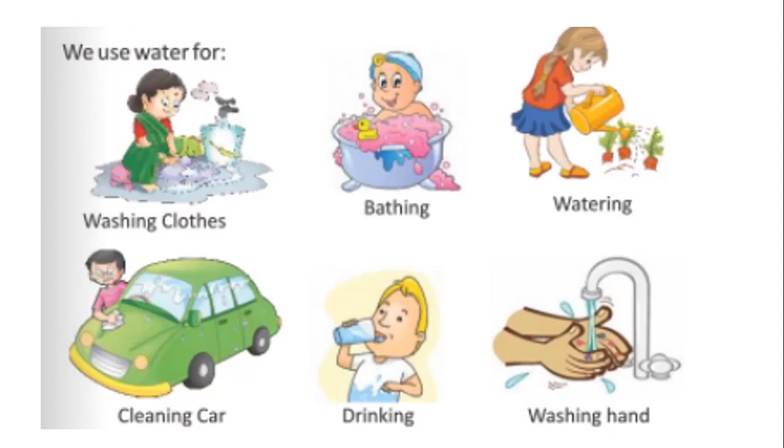We use water every day for drinking, bathing, washing clothes, cooking food, washing utensils, flushing toilets, mopping the floors, etc. We cannot think of our life without water. We use lots of water daily, which is passed on to the drainage system every day. We all use water, and in that process of using water, we make it dirty.

The water, rich in lather, mixed with oil and other pollutants that go down the drains from sinks, showers, toilets, laundries, is dirty. And this is called wastewater. Water, our lifeline. Water is needed by all life forms. Clean water is a basic need of human beings.

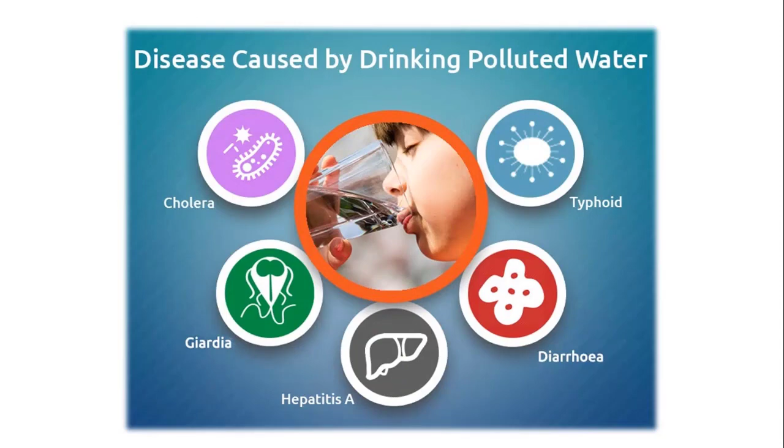Unfortunately, clean water is not available to a large segment of human populations. The water which is unfit for human consumption becomes the source of many waterborne diseases, which ultimately leads to loss of human life. It is estimated that 1 billion people do not get safe drinking water. So, realizing the urgency, we celebrate 22nd March as World Water Day to bring awareness amongst people for safe water, which is fit for human consumption.

Thus, the water is cleaned by removing pollutants before it enters a water body or is reused. This process of wastewater treatment is commonly known as sewage treatment, which takes place in several steps.

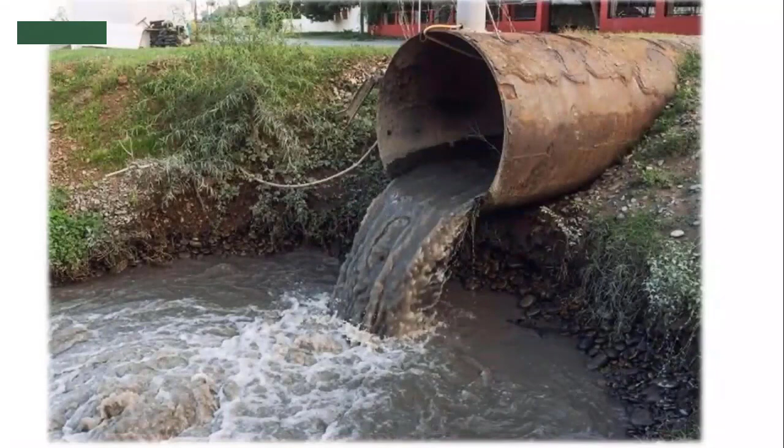On World Water Day, that is 22nd March in 2005, the General Assembly of the United Nations proclaimed the period 2005 to 2015 as the International Decade for Action on Water for Life. All efforts made during this decade aim to reduce by half the number of people who do not have access to safe drinking water.

Now, sewage. It is the wastewater released by homes, industries, agricultural fields, and other human activities. It also includes rainwater that has run down the streets during a storm or heavy rain, and it is liquid waste. Most of it is water, which has dissolved and suspended impurities called contaminants.

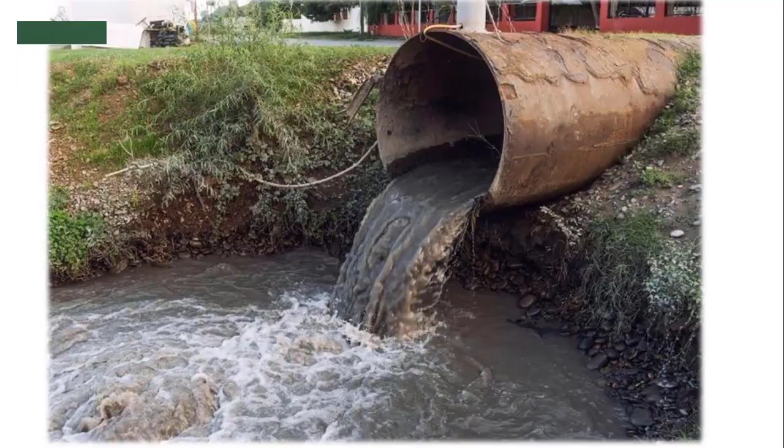Composition of sewage. The following components make the sewage. First, the organic impurities present in sewage are human feces, animal waste like animal dung, urea as urine, oil, fruits and vegetable waste, pesticides, herbicides, etc. The inorganic impurities present in sewage are nitrates, phosphates, and metals. The nutrients present in sewage are nitrogen and phosphorus.

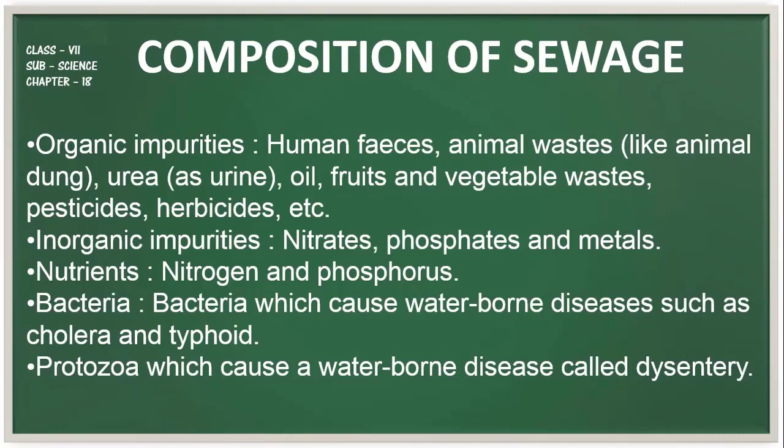The bacteria in sewage include those bacteria which cause waterborne diseases such as cholera and typhoid. The other microbes present in sewage are protozoa, which cause a waterborne disease called dysentery.

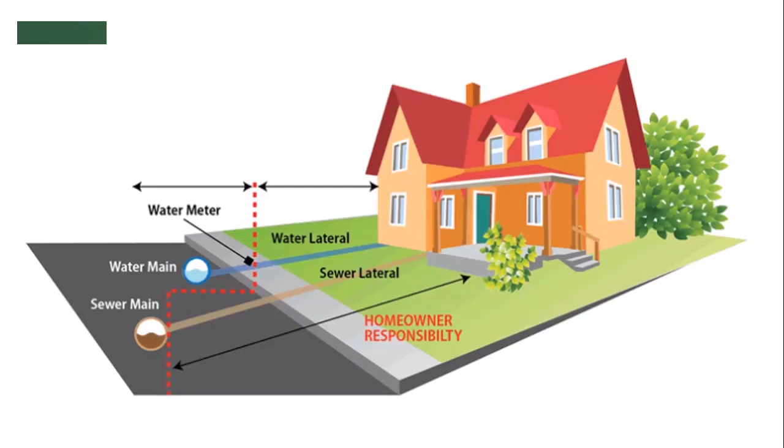Water freshens up: an eventful journey. There are two sets of pipes. One set of pipes brings the clean drinking water into the house, and the other set of pipes takes away the wastewater as sewage from the house. For proper sanitation, a well-maintained sewage system is required.

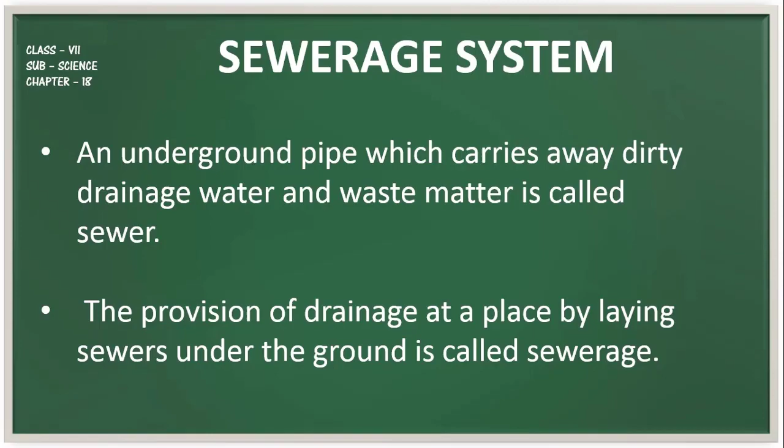Sewerage system. The pipes which carry away wastewater or sewage from houses and other buildings are buried under the ground. An underground pipe which carries away dirty drainage water and waste matter is called a sewer. The provision of drainage at a place by laying sewers under the ground is called sewerage.

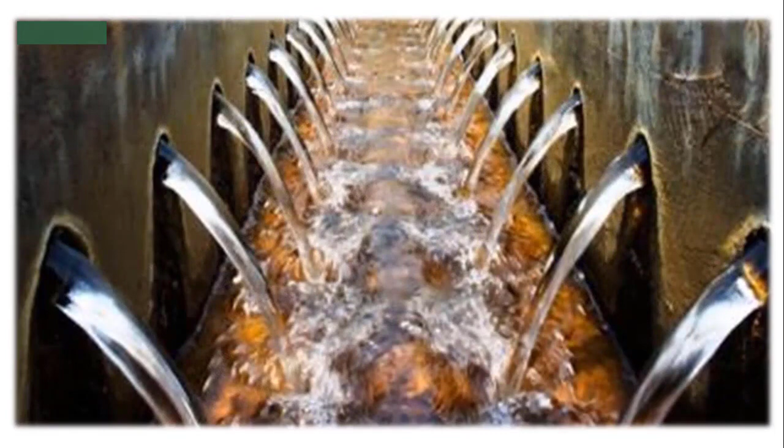Actually, sewerage is an underground network of interconnected pipes called sewers that carries sewage from the place where it is produced to the sewage treatment plants where it is processed.

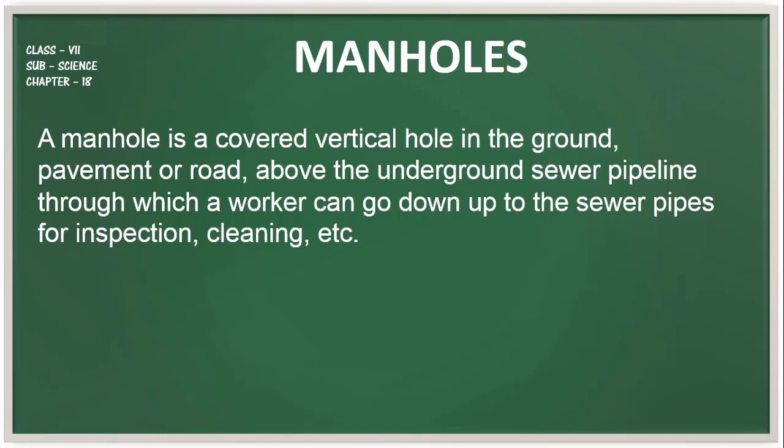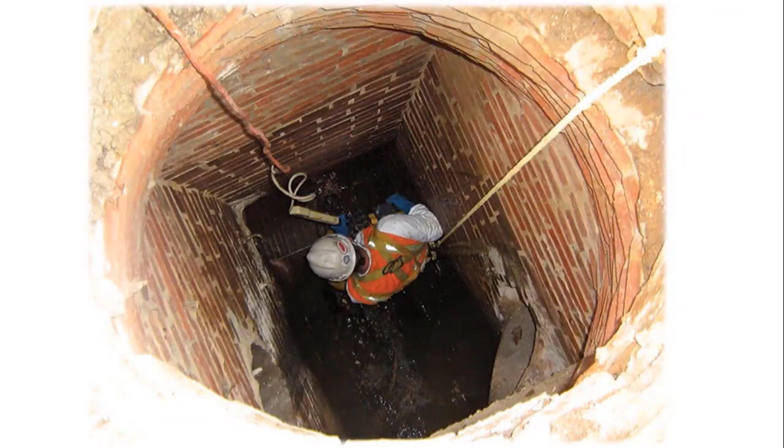Manholes. A manhole is a covered vertical hole in the ground, pavement or road above the underground sewer pipeline through which a worker can go down to the sewer pipes for inspection, cleaning, etc. Manholes are provided at every 50 to 60 meter distance in the main sewer pipeline. Manholes are also provided at the junction of two or more sewers and at points where there is a change in the direction of the sewer line.

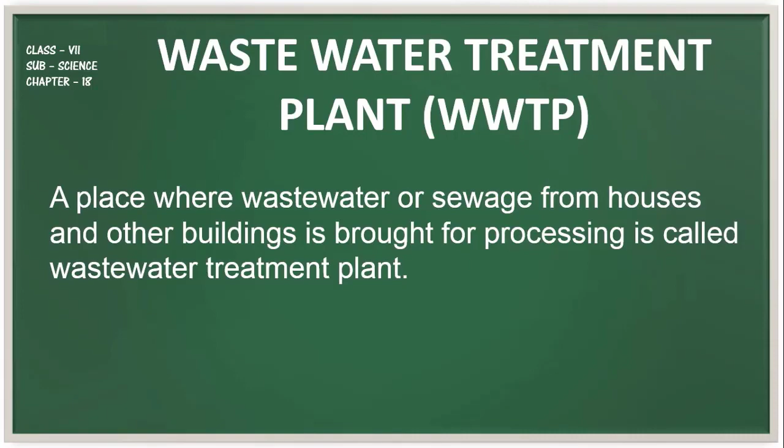Now, the treatment of polluted water. Wastewater treatment is a process used to remove contaminants and make the water usable. It consists of wastewater collection, screening, primary treatment, secondary treatment, and then final treatment.

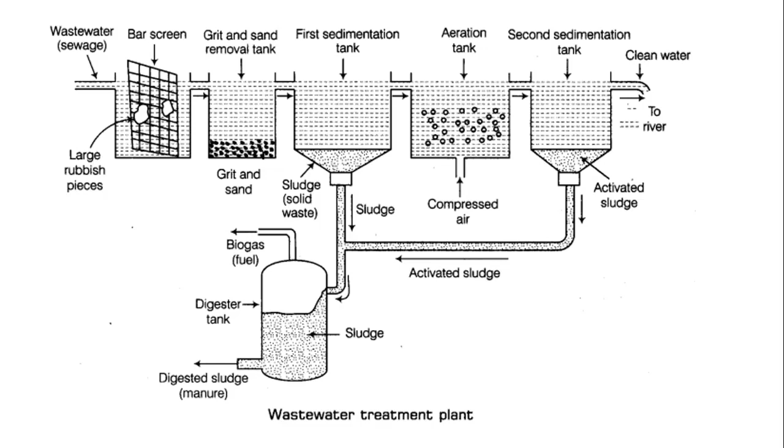Screening is one of the first stages in the process of treating wastewater. In this process, the larger objects are removed from the wastewater and then moved into the grit and sand removal tank. Then, primary treatment. Wastewater after screening is taken for primary treatment where all the organic waste is removed.

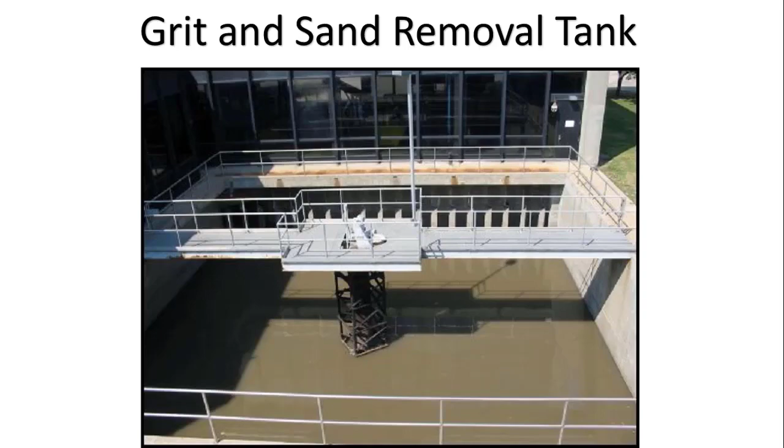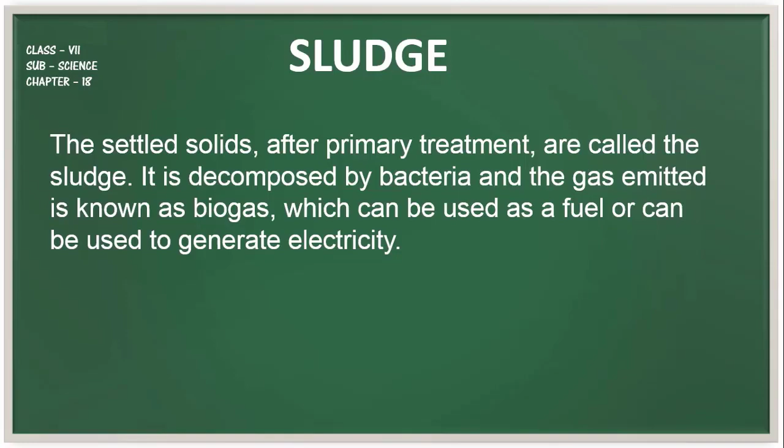Primary treatment is done by pouring the wastewater into big tanks for the solid matter to settle at the bottom of the tanks. After that, the settled solids after primary treatment are called the sludge. It is decomposed by the bacteria and the gas emitted is known as biogas, which can be used as fuel or can be used to generate electricity. And then secondary treatment.

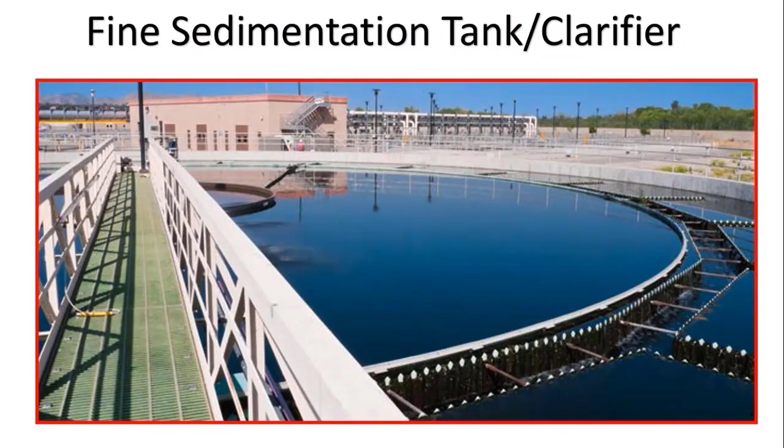Water after primary treatment is passed through a tank called aeration tank, where the air is tapped into the water to increase the growth of aerobic bacteria. Bacteria break down small particles of sludge that escaped after primary treatment.

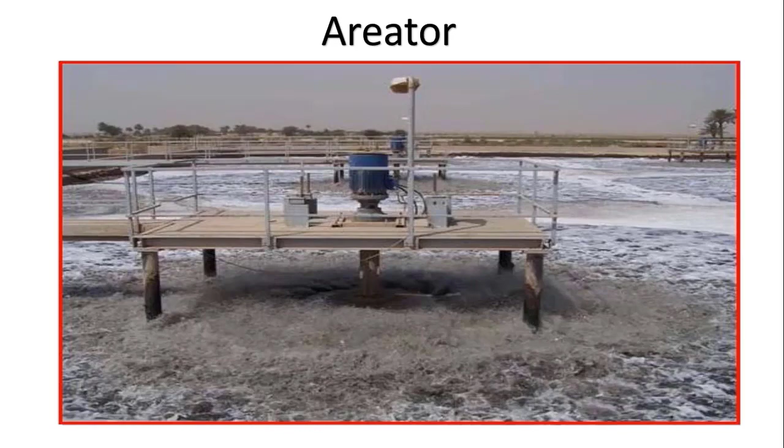And then activated sludge. After the secondary treatment, the broken down sludge settles down at the base of a huge tank known as activated sludge. It contains air in it. And in the last, final treatment.

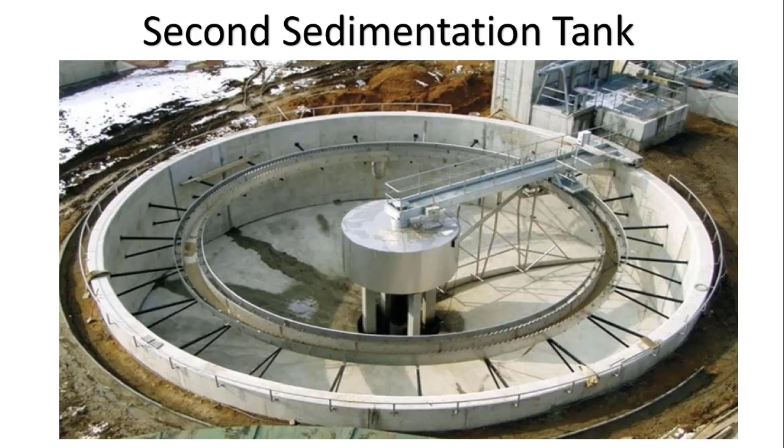The activated sludge is passed through a bed of sand drying machine where the sludge is dried up and the water is filtered out. The water is directed to flow over a wall wherein it gets filtered through sand bed to eliminate additional particles if any. This water that is filtered is then released into the river.

Better housekeeping practices. Cooking oil and fats should not be thrown down the drain as the fats clog and block the pipes. Used tea leaves, solid food remains, soft toys, cotton, sanitary towels, etc. should not be thrown in drains as they do not allow free flow of oxygen. This hampers the degradation process.

Sanitation. Sanitation generally refers to the provision of facilities and services for the safe disposal of human urine and feces. Poor sanitation causes a large number of diseases and health hazards.

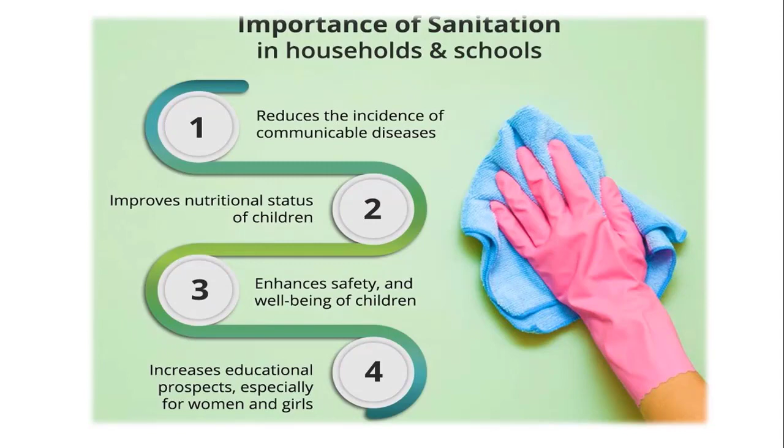Vermi-composting toilet. In this process, the waste sewage slurry collected from sewage disposal systems is treated with earthworms, wigglers, and tigerworms. They decompose the fecal matter, kitchen waste, and other household organic waste. It is a very simple, hygienic, and low water consuming process with no odor or flies problem.

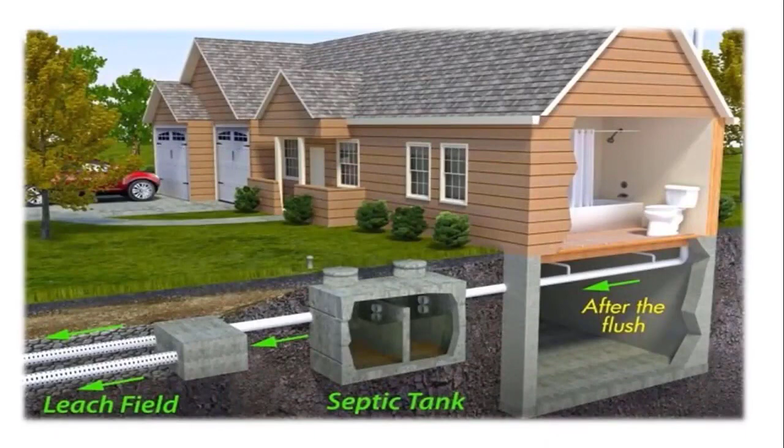At last, septic tanks. The septic tank is a buried, watertight container usually made of concrete or polythene in which sewage is collected and allowed to decompose through bacterial activity before draining by means of a soak away. Septic tanks are suitable for places where there is no sewerage system, for hospitals, isolated buildings, or a cluster of 4 to 5 houses.

Some organizations offer hygienic on-site human waste disposal technology. These toilets do not require scavenging. Excreta from the toilet seats flow through covered drains into a biogas plant. The biogas produced is used as a source of energy.

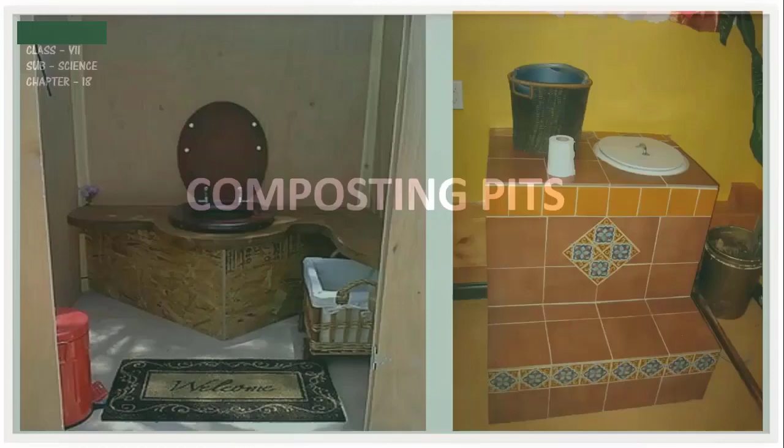The anaerobic bacteria break down most of the solid organic matter present in human excreta, due to which the volume of solid waste is reduced very much. The digested solid waste keeps on depositing at the bottom of the septic tank. The watery waste is also cleaned by anaerobic bacteria. The excess water goes out of the septic tank through the outlet pipe and gets absorbed in soil.

Second, composting pits. These are self-sustained human waste disposal units which are not connected to a sewer line or a septic tank. A composting toilet breaks down and dehydrates human waste to compost.

Chemical toilets. These toilets have limited storage capacity for human waste and need to be emptied periodically. These are the toilets which use a chemically treated reservoir located just below the toilet seats. The chemicals reduce the foul smell coming out of the human excreta and carry out partial disinfection of human waste.

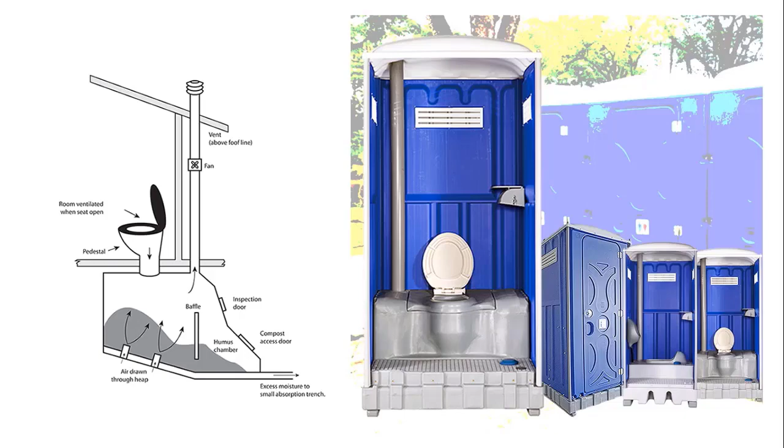The last topic, sanitation at public places. In our country, fairs are organized periodically. A large number of people participate in them. In the same way, railway stations, bus depots, airports, and hospitals are very busy places. Thousands of people visit them daily, which generates a large amount of waste. It must be disposed properly, otherwise epidemics could break out.

The government has laid down certain standards of sanitation. Unfortunately, they are not strictly enforced. We should not scatter litter anywhere. If there is no dustbin nearby, we should carry the litter home and throw it in the dustbin.

So the conclusion of whatever we studied in this chapter is that we all have a role to play in keeping our environment clean and healthy. We must realize our responsibility in maintaining the water sources in a healthy state. Adopting good sanitation practices should be our way of life.

As an agent of change, your individual initiative will make a great difference. Influence others with your energy, ideas, and optimism. A lot can be done if people work together. There's a great power in collective action. As an active citizen, we have many responsibilities regarding sanitation.

These can be to ensure that our surroundings are clean, to ensure that the sewerage system in our house is properly managed. If any leakage or an open drain in the sewerage system is present, then it should be reported to the municipality or the Gram Panchayat, to insist that the open drain must be covered properly, and several air and waterborne diseases can be prevented.

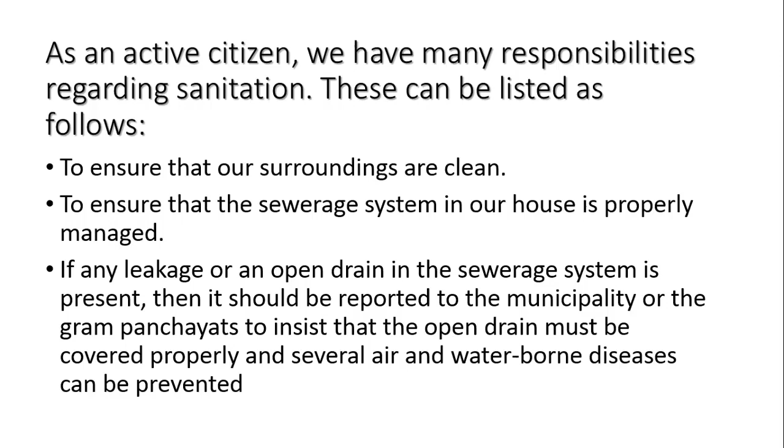As Mahatma Gandhi said, no one needs to wait for anyone else to adopt a humane and enlightened course of action. So, this was all about our chapter wastewater story. I hope that you have understood all the topics which we have studied in this chapter.